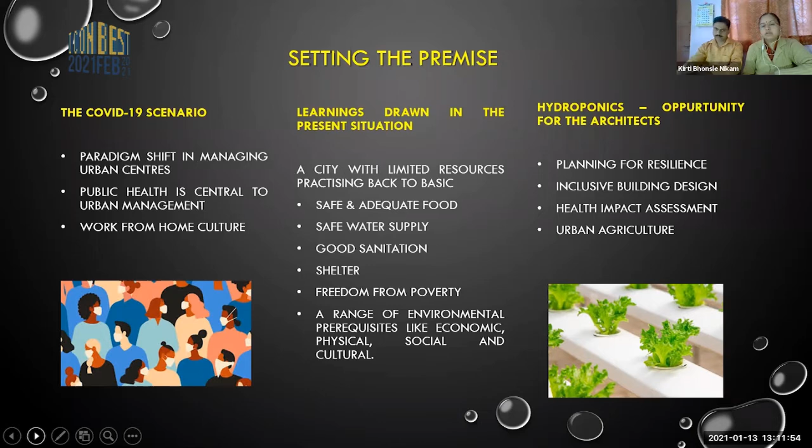This also talks about work from home. So now when the city, with limited resources, has to come back to the basics, we are looking forward to safe and adequate food, safe water supply, good sanitation, shelter, freedom from poverty. There are a range of environmental prerequisites like economic, physical, social, and cultural, which need to be learned as a lesson in this pandemic situation.

So now, with this kind of situation where public health has become so very important, you try to remain healthy not just for yourself, but also for your neighbors' health and the city's health overall. So that has become one of the main agendas.

With health concern taking so much prominence, we are planning cities more towards resiliency, trying to come up with inclusive building designs. We're also trying to come up with health impact assessments, and how important agriculture is now towards maintaining a proper healthy city. So this is basically trying to set up a premise for our presentation in the current situation.

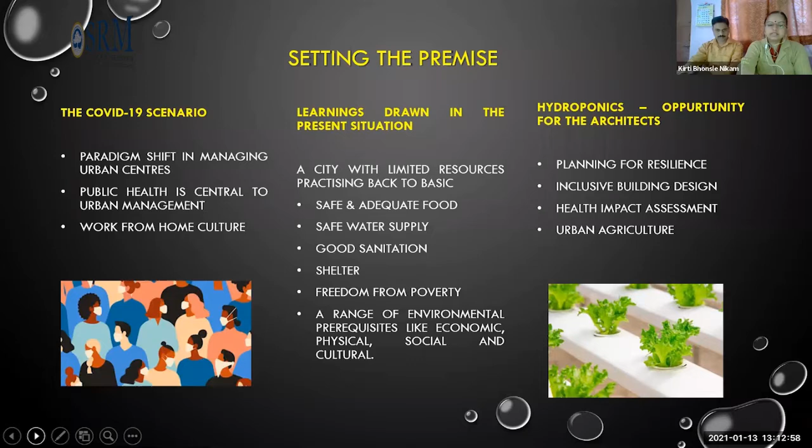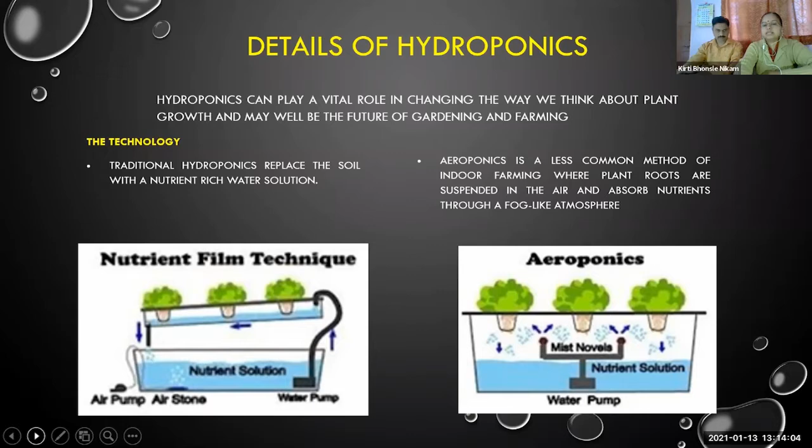We'll be discussing more the traditional way, and how in existing buildings we have been trying to come up with hydroponic systems. Now if we look into the potentials of hydroponics, the advantages and disadvantages, it is basically a method of growing plants without soil, using mineral nutrient solutions with an aqueous solvent.

It allows the plants to grow faster. It virtually eliminates the need for herbicides and pesticides compared to traditional soil gardening. The water used in the system is reused, so we require very little water, which is one of the most precious resources of the current times.

And the utilization of space is very good with the help of hydroponic farming. Even if it is a very small space, a balcony or a terrace, it can be very well utilized. Fresh produce means you can have harvest very close to your own house - green leafy vegetables, vegetables or fruits, close to your house. You can grow them, and you can be assured they are free of pesticides and herbicides, and healthy for your family.

But if you look into the disadvantages, we find that the initial setup cost is a little expensive. Growing a hydroponic garden demands a lot of expertise - not just engineering and architectural skills, but we also need good agronomists who can monitor the growth of the plant at every stage of its development and growth.

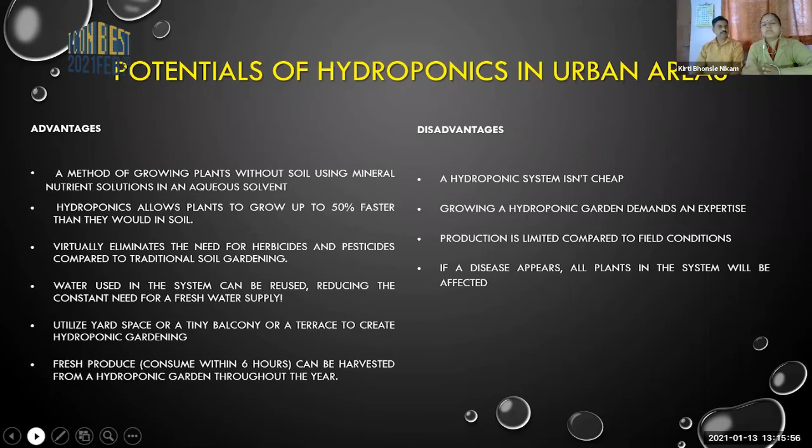Initial cost is more, but later on you find that it is much healthier and more cost efficient. There's a better growth rate, it saves water, there are no weeds, and fewer pests and diseases.

It is less labor intensive, meaning with a lesser number of labor we are probably able to come up with better produce. The solvent can be recycled. There is control over climate, hence cultivation can happen all year round.

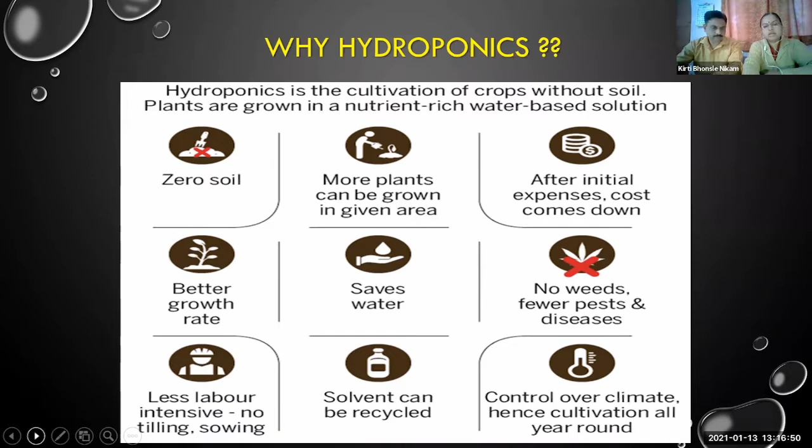So these are some of the advantages of hydroponics on a larger perspective. Now, what's important here as architects - we as architects and planners find that cities are composed of different kinds of land uses, like commercial, residential, institutional, utility, and amenity areas.

Based on the land use typology and the needs of the client, the space evaluation has to be done. For example, if it is a commercial space and a hotel, how well the terrace of the hotel can be utilized is important for us, and it's important to check the feasibility of proposing the hydroponic system there.

If it is a residential building, then what spaces are available? Do we have a balcony? What is the facing, which direction it is facing, where are the winds moving, and so on. These things have to be evaluated by the architect well in advance, and then a proper solution or suggestion given to the client.

So the existing space, its orientation, electricity, and water availability can be evaluated in terms of quality and quantity. Space availability is very important as per the kind of land use we have in the city. The produce is grown much closer to the client or the consumer.

There are high yields, significantly cutting down the land used for farming. We have indoor farms that can be started on rooftops, in communal gardens, even in elevator shafts, adding to the aesthetics and the utility of the building both.

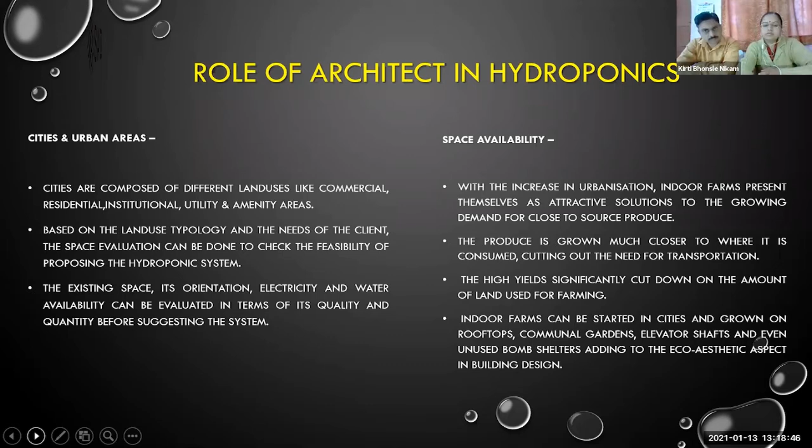So here, we as architects, our role becomes even more important when we are trying to come up with hydroponics as a utility, something which gives us good health and also offers aesthetics to our building design. If we look into the overall perspectives of hydroponics, we find it has got multifaceted advantages that we can experience after putting it into our projects.

If we look into the eco-aesthetic aspect of hydroponics in building design, it can be used for designing wall facades very effectively with ornamental plants in residential or commercial buildings. We can also have freestanding structures designed with plants for better oxygen levels and lowering the temperature in the building.

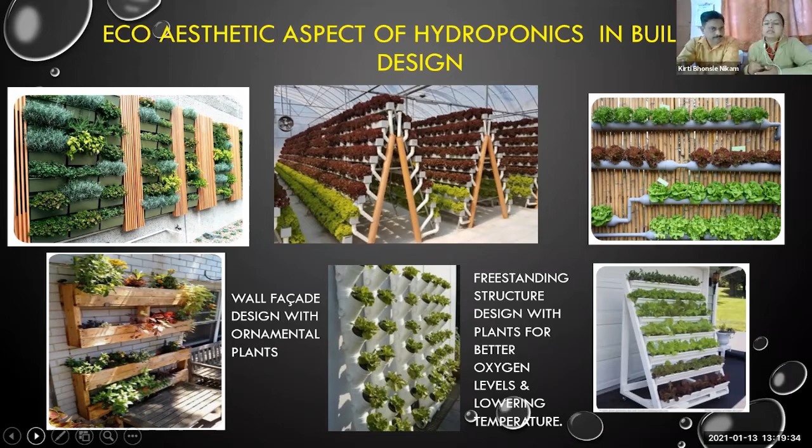So it can give a new angle to the way we have been looking at landscaping - not just for aesthetics, but now landscaping becomes more utilitarian, with a perspective of health added on to it.

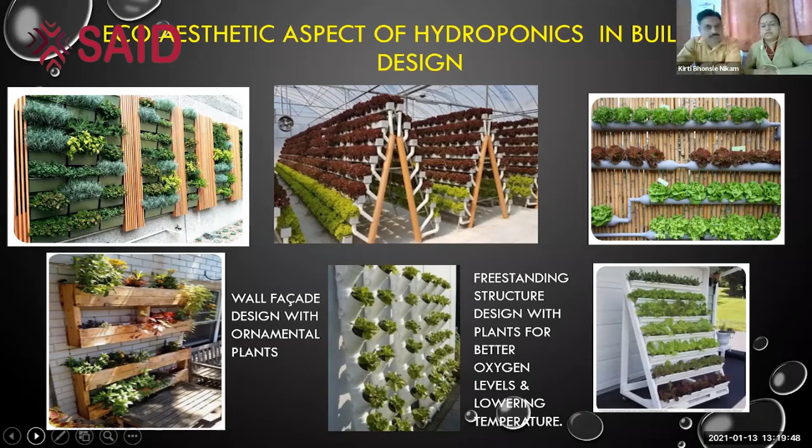Now with this, we have the systems of hydroponics which will be taken up by Mr. Nishant Nikam. He will be talking to us about the same. Hello everyone, this is Nishant Nikam.

As ma'am has explained the basics of hydroponics, I am throwing light on the critical aspects of hydroponics. This subject is very interesting. Before we proceed further, here are a few installations at various places in Nagpur - this is 16 planters, this is 70 planters, and 100 planters like this.

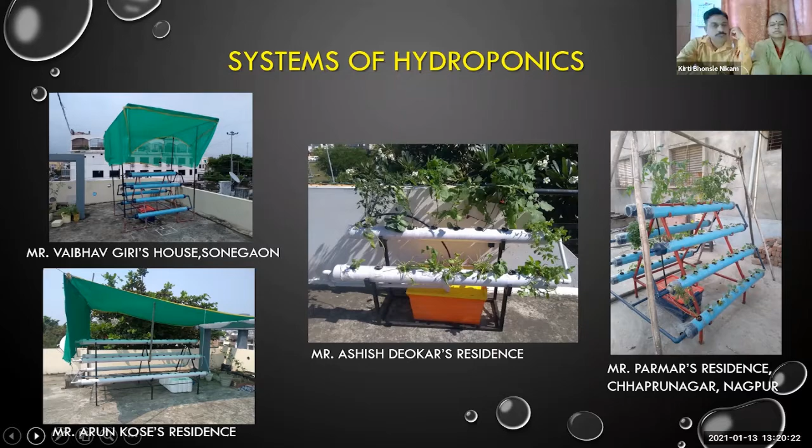Now to assemble this system, there are typical components required. So now we will discuss the components. The first component is the growing media.

This is soilless technology, as ma'am says - it's an Israel technology. So as a substitute for soil, growing media is used. Generally coco peat, peat moss, rock wool, grow stones, and oasis blocks - these are the few materials which are used as growing media.

Then air stones - this is another component. In growing plants, dissolved oxygen is very important, and here air stones disperse tiny bubbles of dissolved oxygen throughout the nutrient solution, so it's very helpful.

The third component is the net pot. Net pots are essential to carry the plant, and it allows roots to grow from the side and at the bottom of the pot.

Then the fourth component is the plastic pipe. Selection of material for the plastic pipe is important - it must be food grade material, and this is important because it carries the net pot, growing media, marbles, and the plant. So it is very important.

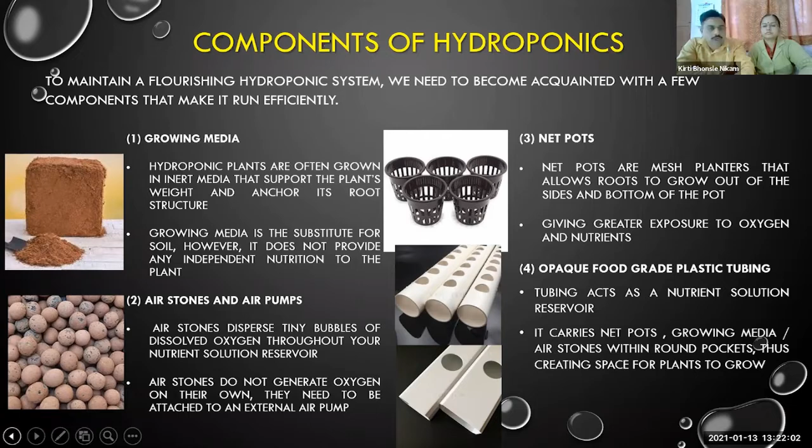After this, the motor, air pump, and monitoring circuit - these are a few other components which are required to make it a complete system.

Now we will see the stages of hydroponics. Initially, system installation is important, which takes care of the whole system. Then in parallel, seed germination is important so that the client understands the procedure of making a nursery - onward, he need not be dependent, and he can make his nursery on his own.

Now, after 15-20 days of sapling growth, the plants are transferred to the hydroponic system. After this transfer...

Here the nutrient management is very important, where the role of the agronomist is vital. As per the quality of water and the crop selected, nutrient management has to be taken care of, and at different stages of plant growth, it is changed.

So close monitoring is important. Now, after all these stages, monitoring by the client is very important. His keen observation of the plant, and any change in plant condition, he has to inform to the agronomist, so that accordingly the solution has to be provided, where the management of nutrient is important.

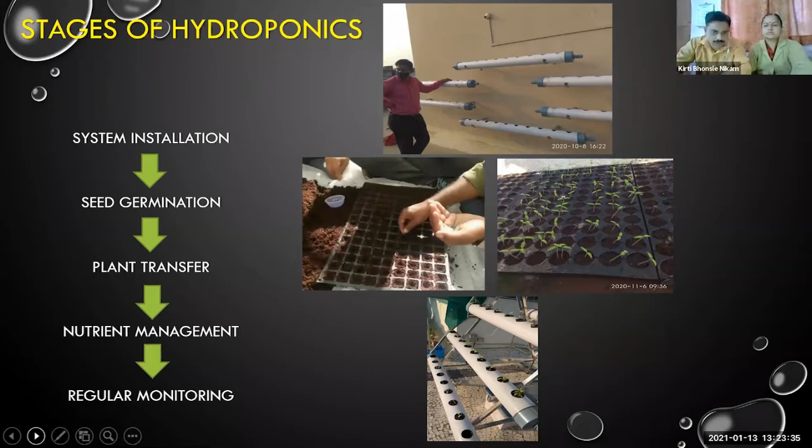Now there are critical parameters in hydroponics specific to the climatic condition of Nagpur. We identified two parameters - one is water quality, and the second is temperature during summer. Now water quality changes from site to site.

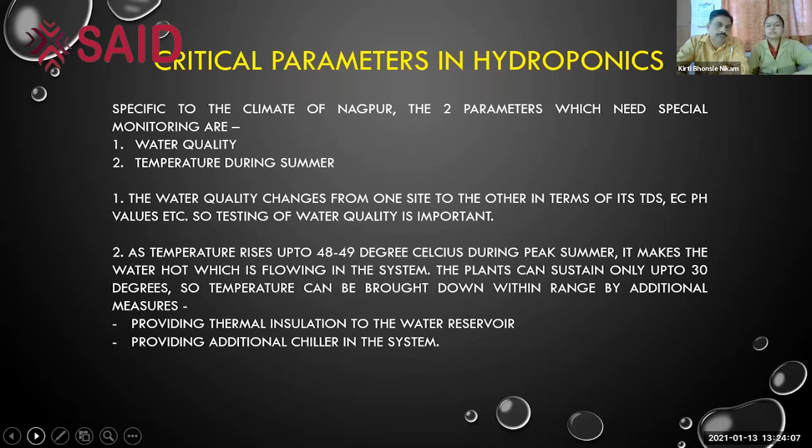It is very important that it has to be tested from a reputed laboratory, where you have to evaluate a few parameters like total dissolved solids (TDS), electrical conductivity, pH value, dissolved oxygen, and a few other parameters.

These are the guidelines for the water parameters for agriculture which are already available. With that guideline, the testing of water has to be carried out.

Now the temperature, particularly in Nagpur city, rises up to 48 to 49 degrees during peak summer, which makes the water flowing in the system hot, and the plant can't sustain at 48 degrees. To sustain the plant properly, it should be maintained at 27 to 30 degrees, so we have to maintain that range.

To maintain that range, we have a few solutions which we are practicing. One is providing thermal insulation to the water reservoir, which we can easily insulate. The other is, at extreme conditions, you need to add a chiller in the system. By monitoring or closely handling these two critical parameters, we can run the hydroponic system throughout the year and get vegetables throughout the year.

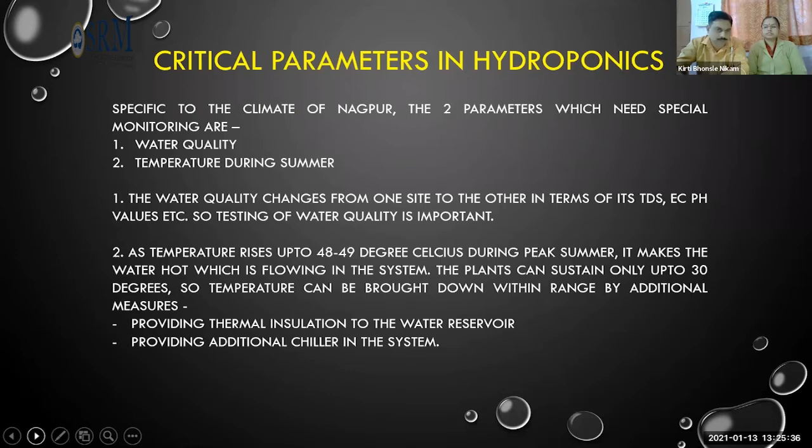Now, to understand this properly from the aesthetic viewpoint and the land utilization viewpoint, we have selected 3 case studies of different types. This case study will be explained in detail by Kirti ma'am.

Thank you, Nishant sir, for sharing your experiences and some of the very critical parameters specific to the city of Nagpur. Here we are trying to discuss 3 projects which we have taken up under Nagpur Hydroponics. Project 1 is at Bharatnagar, the second one is at Shanti Nagar, and the third one is at Mahalakshmi Nagar here at Nagpur.

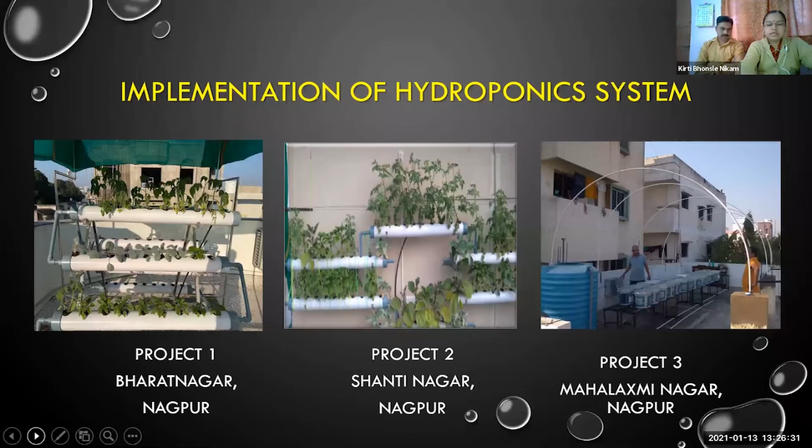If you look into the very first project, this is an existing residence of Mr. Deshmukh, located in Bharatnagar. This is an existing independent house having an approximate area of 3,000 square feet. It is facing towards the west, and it's a corner plot, as you can see in the picture.

Here we had the challenge that the terrace was divided into upper and lower terrace. The upper terrace already had a solar panel, so we only had the option of using the lower terrace for the hydroponic system that had to be installed. It also has a central ventilator.

The hydroponic system, which was A-shaped and freestanding, was installed at one corner location. We also had the lining of the terrace garden provided along the periphery of the parapet wall. You can see the green portion in this photograph along the curved wall. Here we have the NFT system, a freestanding A-shaped structure, and along the parapet lining we have grow bags placed along with trays.

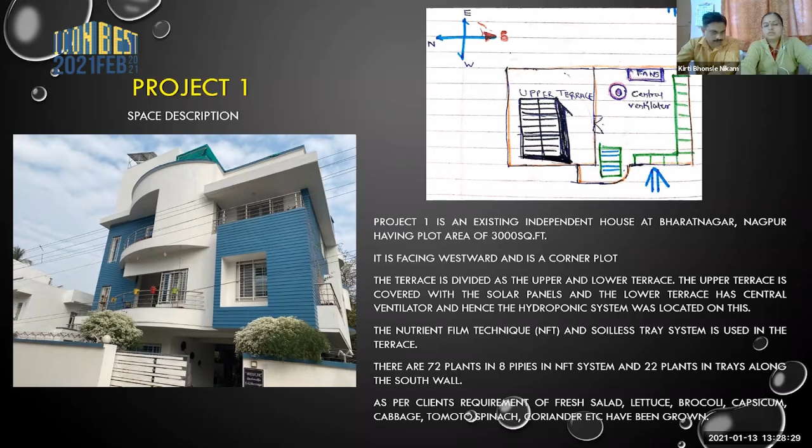As per the client's requirement for fresh salad, we planted cabbage, tomato, spinach, coriander, and other vegetables relating to salad for this particular residence.

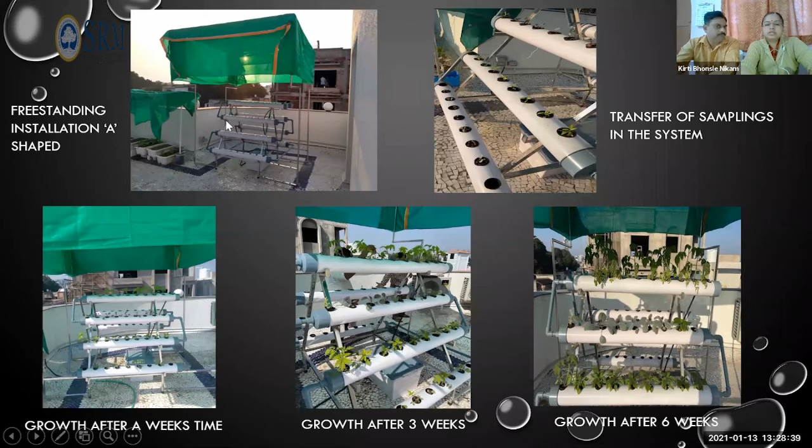This is the freestanding A-shaped installation which has also got a shade net above, so in case the temperature goes up, we have the shade net which can be brought down. The chiller can also be used along with thermal insulation in the water container, which can be installed to lower down the temperatures.

Here we can also see the stages of growth. This is when the saplings were transferred into the net pots and placed into the pipes. This is the growth after a week's time, and this was the growth achieved in 3 weeks' time. This was the kind of growth you can see in the last picture at the right-hand corner.

That is the growth of the plants after 6 weeks. This was in a controlled environment with good amount of nutrition, which has been properly monitored. We have been able to achieve good growth of the plants in 6 weeks duration.

This had very less space, so the client's requirement was to use the wall facade of the staircase, which is facing towards the east. So what we did is the wall facade was being utilized to create 6 pipes which have been put up, using the wall facade facing the east.

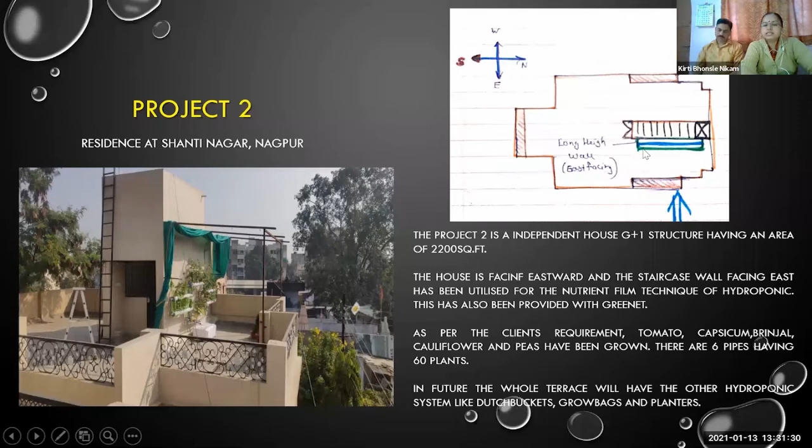This was an important thing, that the client's requirement always has to be taken care of. So this is one of the on-site sketches which we have drawn here, showing the long high wall facing towards the east, which has been used for making the hydroponic system installation.

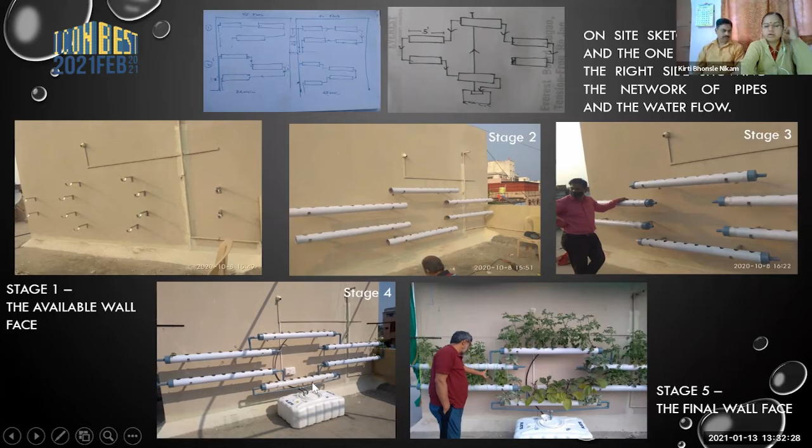This was the 6 pipes which were being installed, and this is the next stage of the installation process. Here we can see, along with the water container, you have got some amount of electric supply also, so that the water flows continuously through all these 6 pipes.

Lastly, you can see the client standing along with his produce and how he enjoys the plant grown by him, and he knows what health benefits it's going to offer to him. So the last photograph shows the client with the garden which he has created on his own terrace.

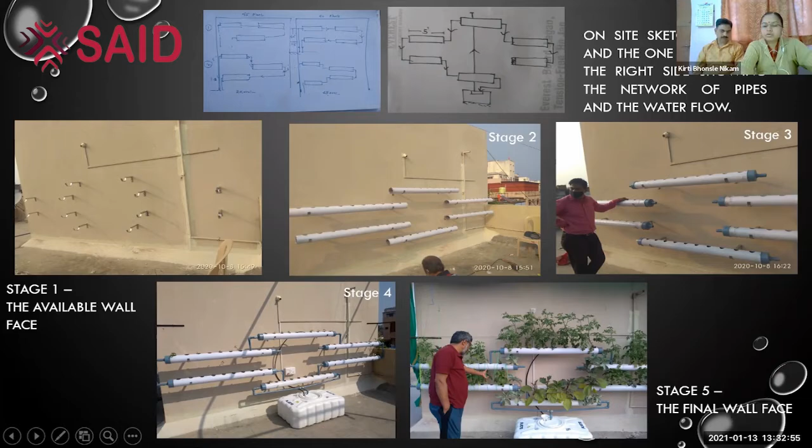Now the third project which we have worked upon is one independent house located in Margi Nagar area of Nagpur. This is a ground structure, and on the terrace we have an installation done using the Dutch buckets, and the arch-shaped shade nets have also been created. So the house is basically facing east.

Initially, the NFT system and grow bags were installed, and later on to check the yields, we have more number of hydroponic systems which have been taken into care. Now the client is confident and he wants to go for the hydroponic setup, complete with grow bag, long trays, and planters, which can come up with the fogger, cooling pads, and sensors.

We are looking forward to a more elaborate setup in project number 3, where various kinds of vegetables like leafy vegetables and underground vegetables such as ginger and potatoes can also be grown.

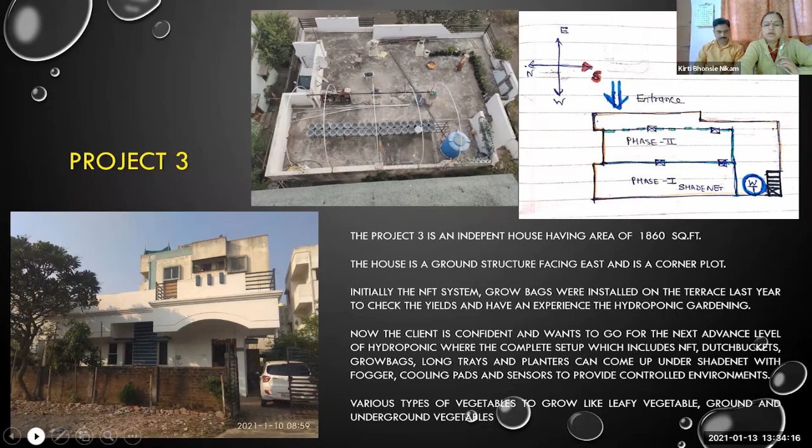In the same project number 3, Dutch buckets have been placed along with an NFT system, and water supply is taken from the tanks and circulated here. These are some of the on-site sketches we have made.

This is the plan showing the Dutch buckets placed centrally, with grow bags along the sides, and at the four corners some very large trees which will come up. This is the front elevation showing the Dutch buckets and the NFT system along the wall, with bigger plants or trees at the four corners.

This is another section you can see here. What we are proposing is shade nets coming up along the arches in the future.

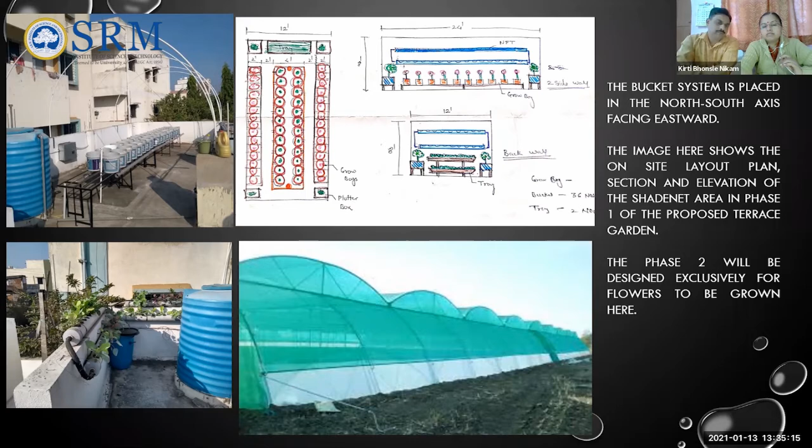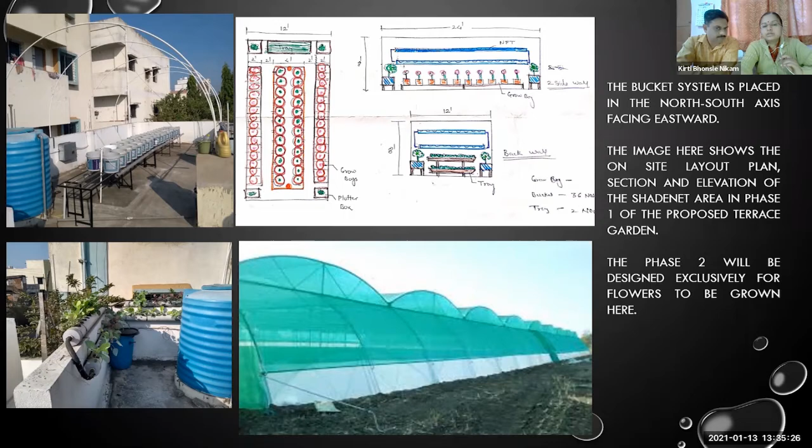This is quite a challenging project for us because the client is experimental in nature and wants to utilize the terrace to experiment with different types of available hydroponic systems, and to come up with a more controlled environment using this shade net.

This is another project which is in process. When we take up projects, we have to continuously stay in touch with the client and monitor the growth or output at every stage. It's not that once the project is done you forget about it—you have to keep taking feedback, because plants are very sensitive and need careful care.

These were some of the feedbacks from clients. Mr. Deshmukh said he feels connected to the roots, and it was a good experience working at the terrace garden in the morning. He is a retired person who enjoys growing his own food.

Mr. Saifuddin Jalali, part of the Central Railways in Nagpur, has a residence there and enjoys home gardening. He has hands-on experience of farming from seeds, sowing, till flowering of the plants, and is very excited for the fruits to come.

These are some enthusiasts working with us, experimenting themselves as well as allowing us to come up with hydroponic systems in existing residential buildings.

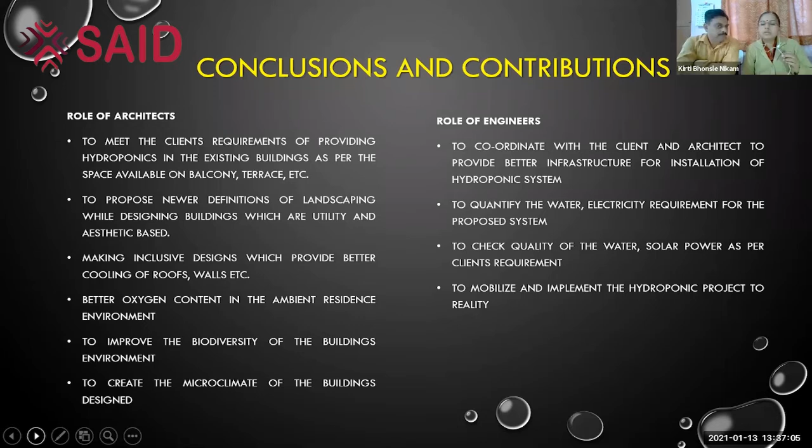Coming to the conclusions, as a team of architects and engineers, our role is basically to meet the client's requirements. That has always been true in architecture, but providing hydroponics in an existing building as per the space available is very challenging. You also have to take care of the client's requirements—while selecting the space, both utility and aesthetics have to be considered.

Another important thing is to propose a newer definition of landscaping while designing buildings that are utility and aesthetic based, making inclusive designs which provide better cooling of roofs, walls, etc., and give better oxygen content. This becomes part of our responsibility in the current scenario where oxygen levels are very important for us—if a residence has good oxygen levels in and around the plot, it will improve the health of the inhabitants as well.

This provides better oxygen content to improve the biodiversity of the building environment. As soon as you introduce plants, vegetables, fruits and flowers into the residence, you immediately find small birds, butterflies and bees becoming part of the biodiversity of the building, and it also adds to the microclimate of the building which has been designed. So it improves the microclimate too.

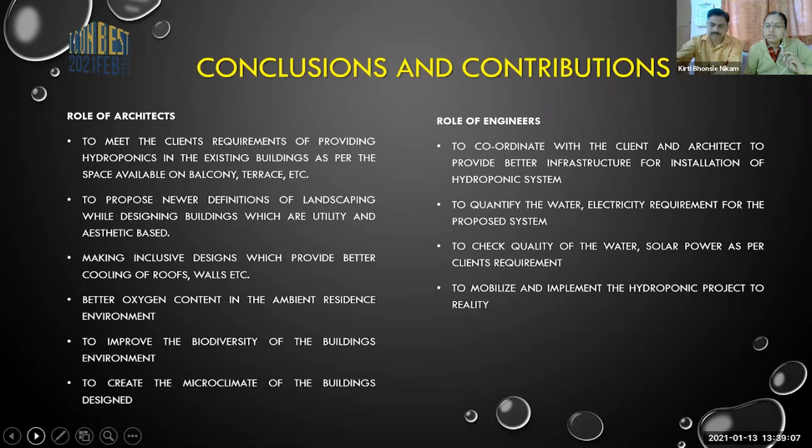If you look into the role of engineers, they coordinate with the client and the architect to provide better infrastructure for the hydroponic system to come up successfully. The engineer also has to quantify the water and electricity needed, and the quality of the same, to be utilized in the proposed system. This has to be taken care of by the engineers, to check the quality of the water and the solar panels used for electricity as per the client's requirement. That becomes very important for the engineers, to mobilize and implement the hydroponic system into reality.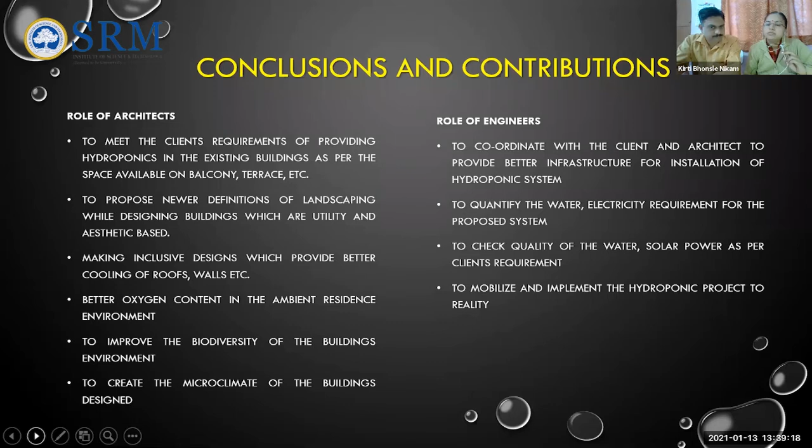After coordinating with so many experts like the agronomist, the architect and the client, the engineer has to make everything possible by lining up things properly. This is how we understood, through the projects we have done here at Nagpur, that the role of architect and engineer go hand in hand. This is something quite important that we have learned in these projects, along with coordination with the clients.

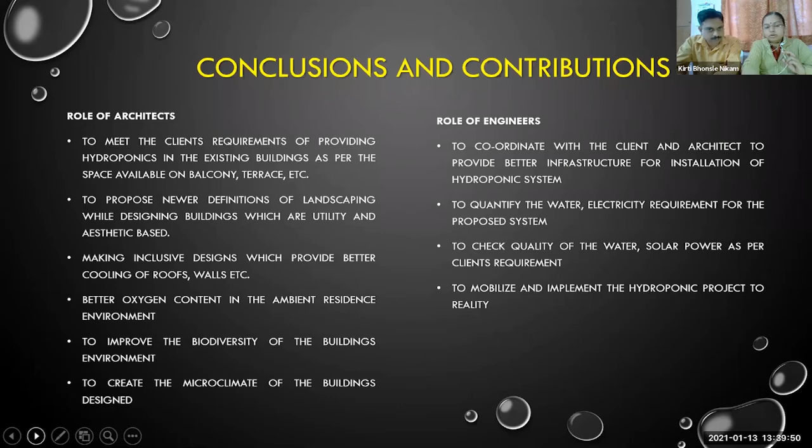So here we come to the end of our presentation, where we have different team members with us. Ravindra Mohite sir is the agronomist with us. Sudhir Mate sir is an urban farming enthusiast, and he gives us newer ideas on how the best utilization of existing spaces can be done. Prashant Umbarkar sir is one of the mechanical engineers with us, with expertise in manufacturing and installation. Prajwal Shantalwar is also looking into the business operations. And Mr. Kunal Ganveer is one of the business administrators and a system developer for us. We are a team of so many people who have joined hands together to bring the dreams of people into reality by introducing hydroponics into existing buildings so far.

But if you look into the future of hydroponics, we would also like to take up projects where the client is interested in hydroponics right from scratch, that is, right from the design of the building. The hydroponics comes into the designing aspect as well. It's not just about the spaces, but hydroponics becomes inclusive to the building design. So we are looking forward to certain projects which will come up accordingly.

As of now, we are coming to the end of the presentation, and thank you very much for giving Nagpur Hydroponics a chance to express their projects, share their projects, and share their experiences of being at Nagpur. Thank you very much.